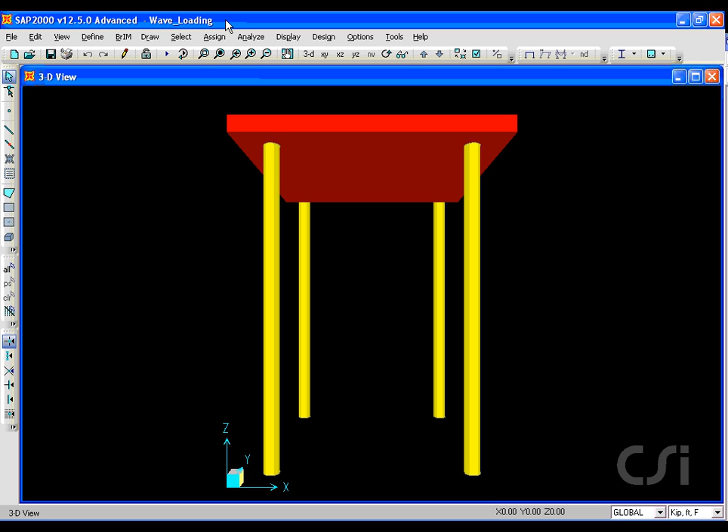This brief tutorial will show the tools that are available for generating wave loadings within SAP 2000. For this example, we will assume that we wish to generate wave loadings on a structure that is submerged in 60 feet of water. The velocities and accelerations calculated in the fluid will be resolved into drag and inertial forces that will ultimately be applied as varying distributed loads on the members.

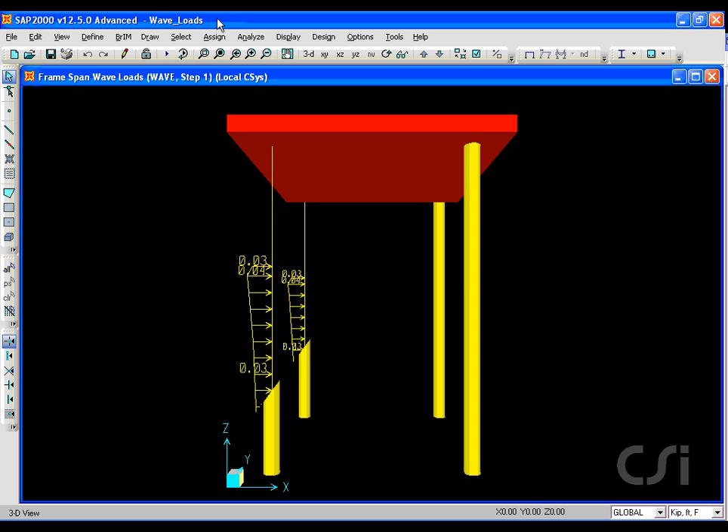The definition of the wave loads is handled through the Define Load Patterns option. We will define a new load pattern named wave with a type of wave, and with the automated lateral load based on the API specifications.

Next, we select the wave case and go to the Modify Lateral Load pattern. Here we specify the wave load parameters, such as the wave characteristics, current profile, marine growth, which affects the width of the members, drag and inertia coefficients, which when used with velocities and accelerations generate forces on the members, and wind load, which can apply wind loads to the non-submerged portion of the structure.

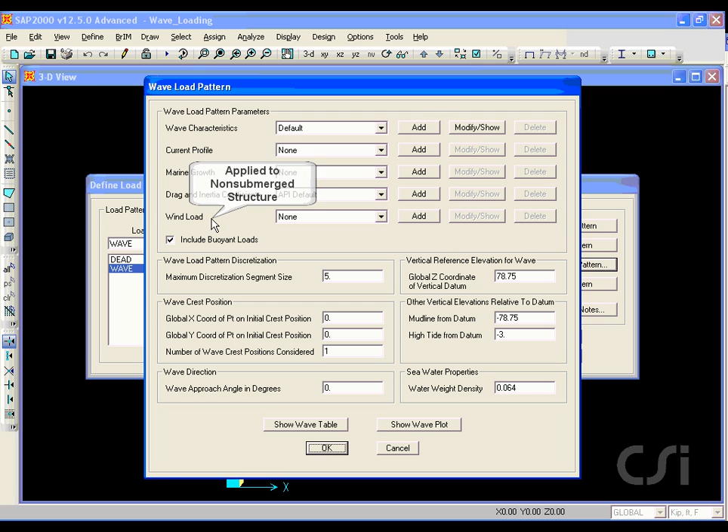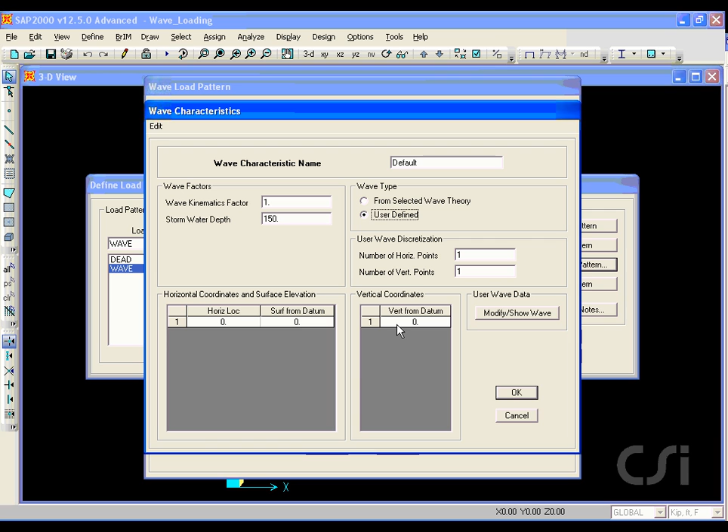Click on the Modify Show button for the characteristics, and we see that under the wave type we have two options, wave theory or user-defined. If user-defined is selected, the user creates a table of wave points. For this example, we select wave theory and will generate a wave using the Airy wave theory.

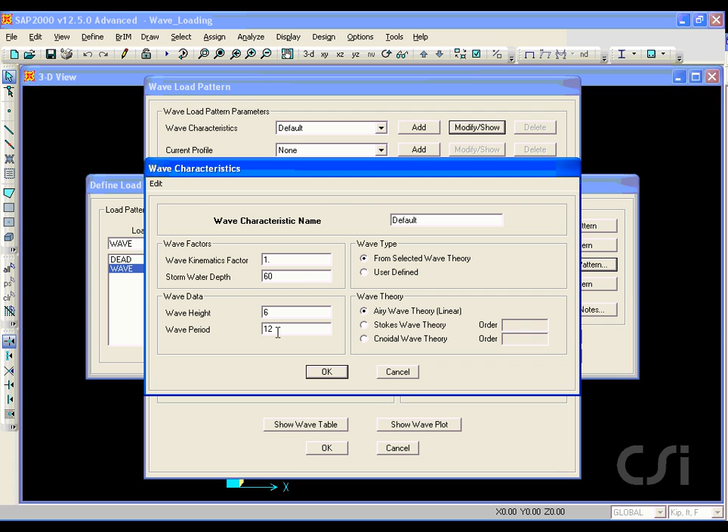We will leave the wave kinematics factor, which accounts for direction spreading, set to 1, but we'll set the storm water depth to 60 feet. The wave height will be set to 6 feet and the period left at 12 seconds. Click OK, and we can finish the data input by reviewing the position and direction of the wave, including the approach angle. For this model, we will consider only one wave crest.

In this case, under the vertical elevations, the datum should be a positive 60 feet, and the mudline will be minus 60 feet below the datum. We will set the high tide to be 0 from datum. We can view the wave by clicking on the Show Wave Plot button. Note that the program has calculated the wavelength from the input data.

On the plot, we have a number of items that may be displayed. The Click for Value option allows us to click anywhere on the plot to obtain the coordinates, as well as the velocities, the accelerations, and the pressure. The Contours option displays the velocity, acceleration, and pressure contours.

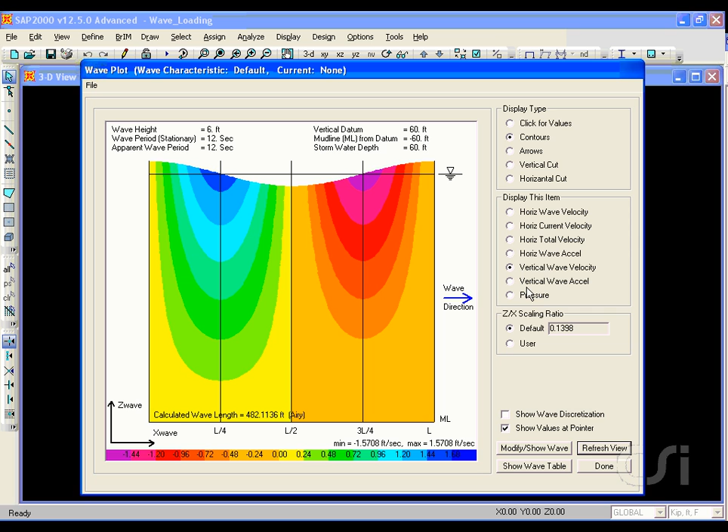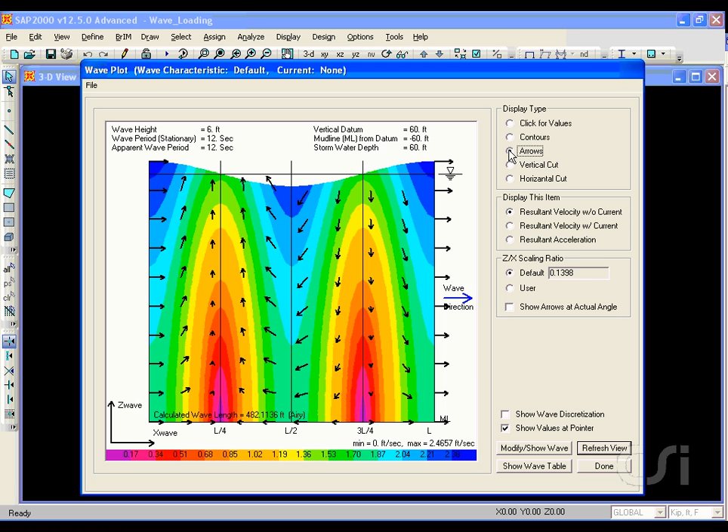The arrow selection displays the resultant velocities and accelerations, while the vertical and horizontal cuts will draw a diagram of the selected item at any location on the plot.

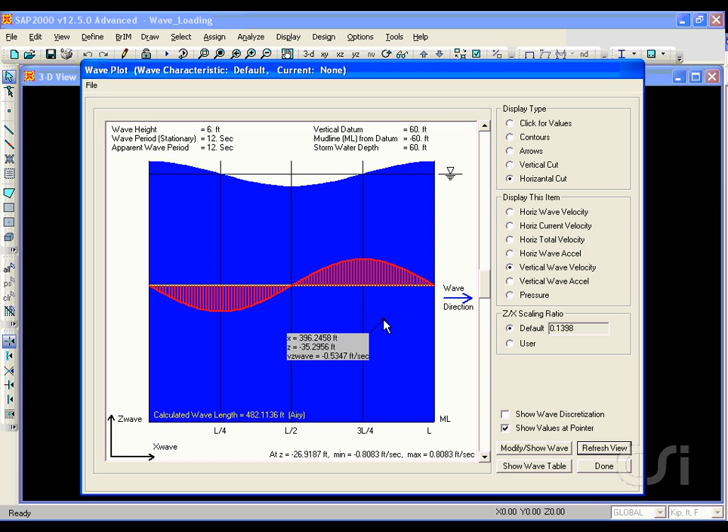If the Show Values at Pointer option is checked, the cursor will continuously display the coordinates and the value of the selected item, which in this case is vertical velocity. A click on the Done and then the OK buttons completes the wave loading pattern for this example.

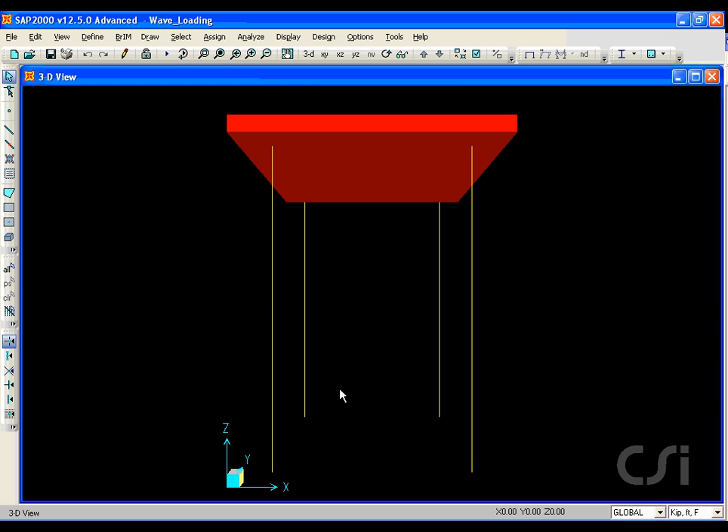Going to the Display Show Load Assigns command, and selecting the wave load pattern, shows that the wave loads have been applied. This concludes this tutorial.